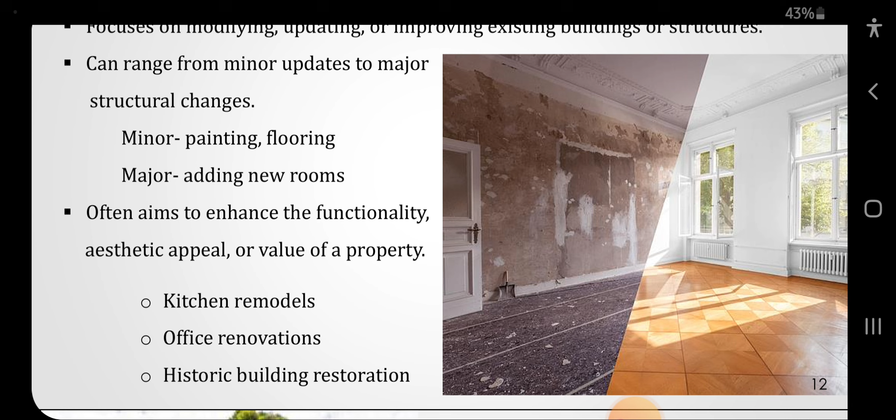Often aimed to enhance the functionality, aesthetic appeal or value of a property. ක්‍රියාකාරීත්වය වැඩි දියුණු කිරීමක් එහෙම නැත්නම් අලංකාරය ඉහළ නැංවීමක් සෝ property එකට අලුතෙන් අගය එකතු කිරීමක් සඳහා තමයි මේ වගේ දෙයක් කරන්නේ. kitchen remodels, office renovation, historic building restoration වගේ ඒවාට උදාහරණ.

ඊට පස්සේ අපි බලමු specialized construction කියන්නේ මොකක්ද කියලා. Specialized construction involve projects with specialized requirements, often adhering to standards or involving unique construction techniques. Varies widely depending on the specialization, from sustainable building practices to highly technical installation. Example, green building.

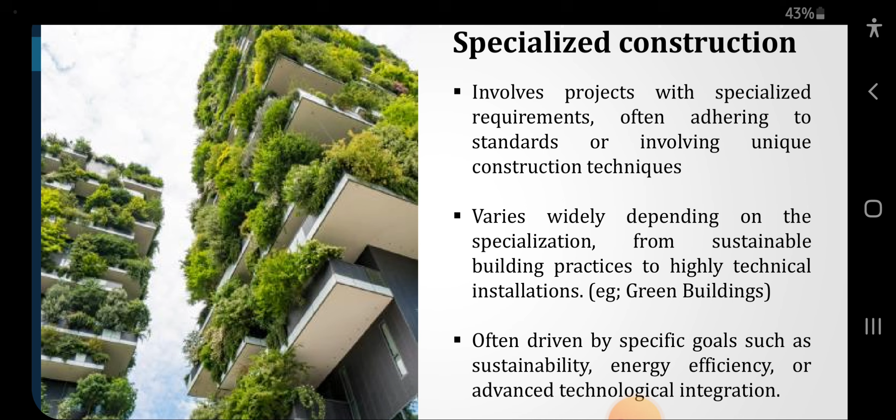So often driven by specific goals such as sustainability, energy efficiency or advanced technological integration. එතකොට specialized construction වලදී ඒගොල්ලෝ goals විදිහට ගන්න පුළුවන් sustainability, energy efficiency and advanced technological integration.

Types of projects වලදී අපි ඊළඟට second one එක කිව්වා based on function and usage. The second type එක තමයි function and usage. This can be identified in several categories such as residential, commercial, government institutional, industrial or infrastructure. When you come to residential, we'll go through one by one: single family houses, multi-family dwellings, high-rise apartments. Focuses on creating space where people live. 30 to 35% of the industry, largely private, designed by architects, builders, or developers.

Governmental institution, the second type: schools and universities, government offices and hospitals.

Commercial: construction of buildings and facilities used for businesses, trade and services. Retail stores and shopping centers, warehouses and light manufacturing. Office buildings, single story or skyscrapers. Hotel, convention centers and theaters.

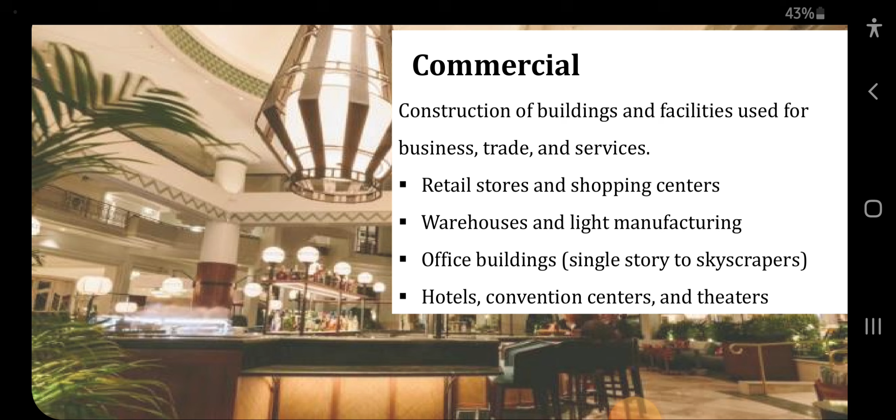Then industrial, this is another special type of construction, where the construction of facilities used for manufacturing, processing and production activities. මේ industrial buildings ගන්නේ manufacturing එකකට යම් නිෂ්පාදනයක් එහෙම නැත්නම් process එකක් එහෙම නැත්නම් production එකක් කිරීමට තමයි මේ buildings design කරන්නේ. උදාහරණයකට petrol refineries ඒකත් construction එකක්. ඛනිජ පිරිපහදුවක්. Steel mills and aluminium plants, chemical processing plants වගේ ඒවා අපිට උදාහරණ විදිහට ගන්න පුළුවන්.

Infrastructure, දැන් අපි infrastructure කියන එක ඒක තවත් construction එකක්. එතකොට ඔබ දන්නවා highways and bridges, railroads, tunnels and reservoirs, airports, seaports, irrigation system, water treatment plants. These are the infrastructural construction.

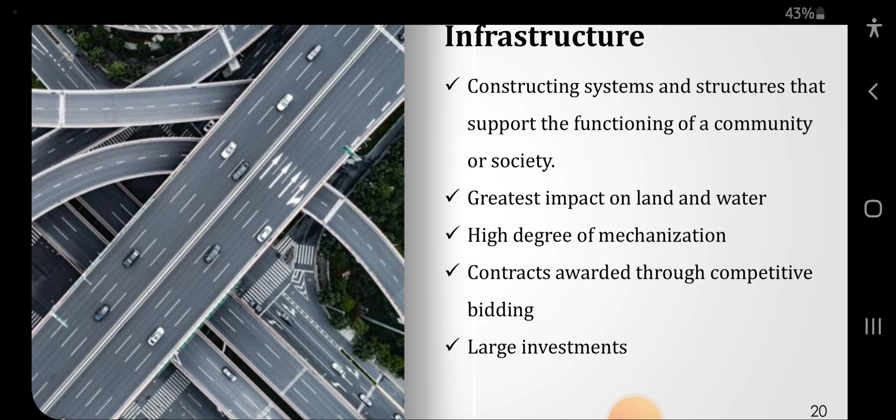Then infrastructure: constructing systems and structures that support the functioning of a community or society. Greatest impact on land and water. High degree of mechanization. Contracts awarded through competitive bidding. Large investment. එතකොට මේ infrastructure කියන එක සංකීර්ණ යනුම ලොකු investment එකක්. එතකොට මේ competitive bidding කියන එකෙන් තමයි මේවට tenders award කරන්නේ.

Okay, now we know what are the two types of construction projects, and we identify each of the two types deeply.

Okay, now we come to a new heading: main parties of a construction project. So construction project එකේ ඉන්න පාර්ශව හඳුනා ගැනීමක් අපි කරන්න යනවා දැන්. What are the main parties of a construction project? I already mentioned some of them, like client, consultant or engineer, contractor and architect are the main parties. Also construction business promoters, construction manpower recruitment and training agencies, banking and finance institutions, construction material developers, construction plant and machinery manufacturers, distributors, repairs and maintenance organizations.

Client. Okay, we will go through each of the parties deeply now. The client or the owner has a specific goal, expectation and a budget that is in alignment with these goals and expectations.

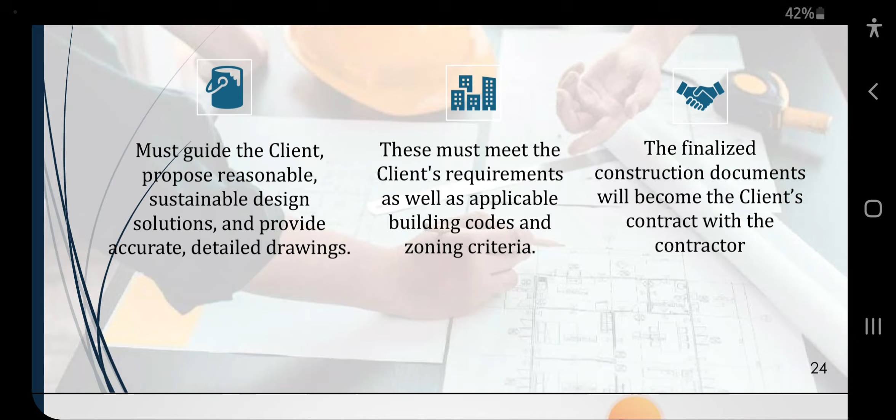The contractor is hired by the client to complete the project, handling the construction part and execution of the work activities required for project completion. Roles and responsibilities include project planning, management, monitoring, construction site safety, and legal issues.

The contractor also appoints subcontractors who have special expertise to execute certain parts of the project that cannot be constructed by the contractor. So subcontractor is another term that you have to keep in mind.

Types of contractors: traditional contractors, design bid build method, where the client wishes to use their own design and appoints a consultant to design. Design and build contractors, where the project is more functional and the client does not wish to use their own design.

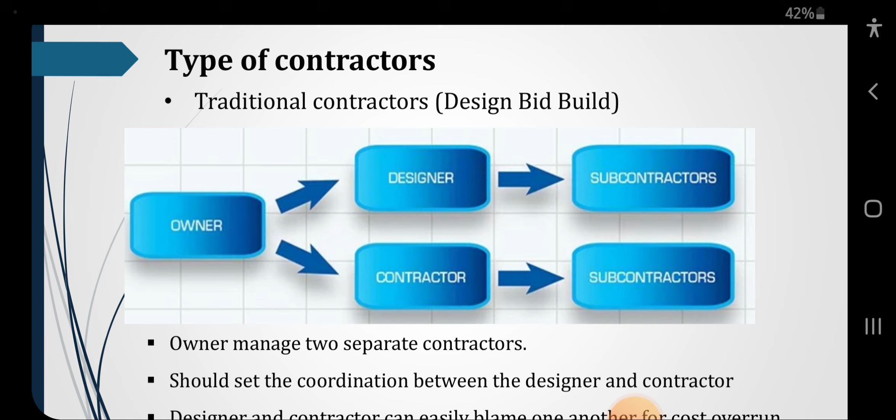Types of contractors: traditional contractors, or design bid build. The owner, designer, and contractor are two separate parties. The designer has subcontractors and the contractor also has subcontractors. The owner manages two separate contractors, the designer and contractor, and should set coordination between them. Designer and contractor can easily blame one another for cost overrun.

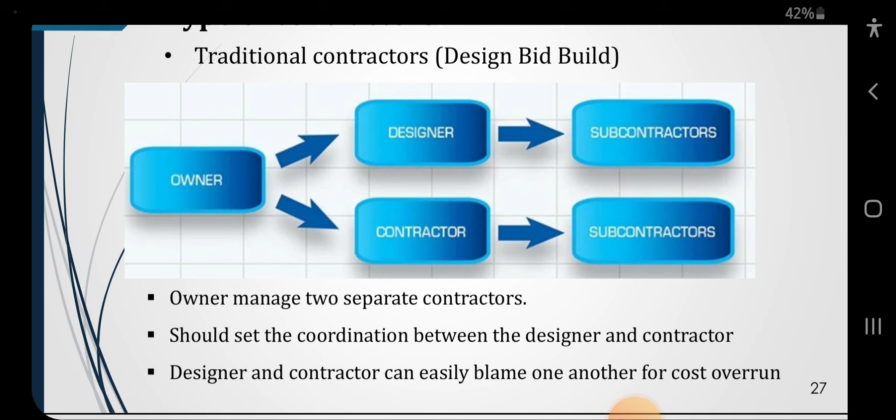Type of contractor: design and build contractor, compared to the previous design bid build contractor. Here the owner manages only the design build team, which then manages the subcontractors. So the owner manages only one contractor with a single point of responsibility, and the designer and contractor are in the same team.

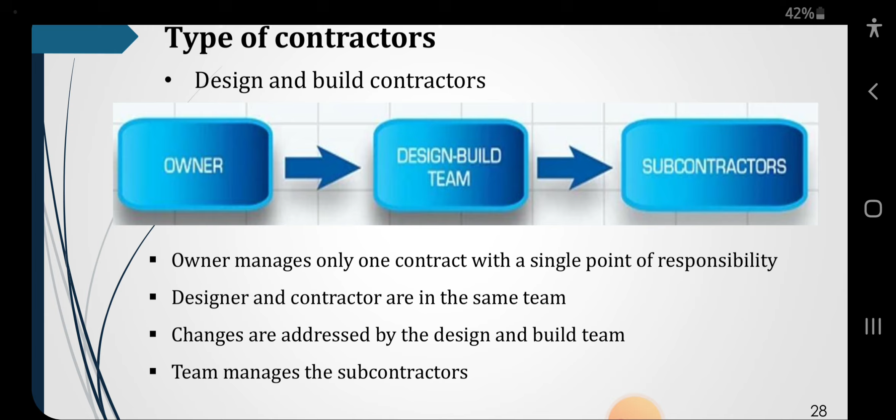Changes are addressed by the design and build team, and the team manages the subcontractors.

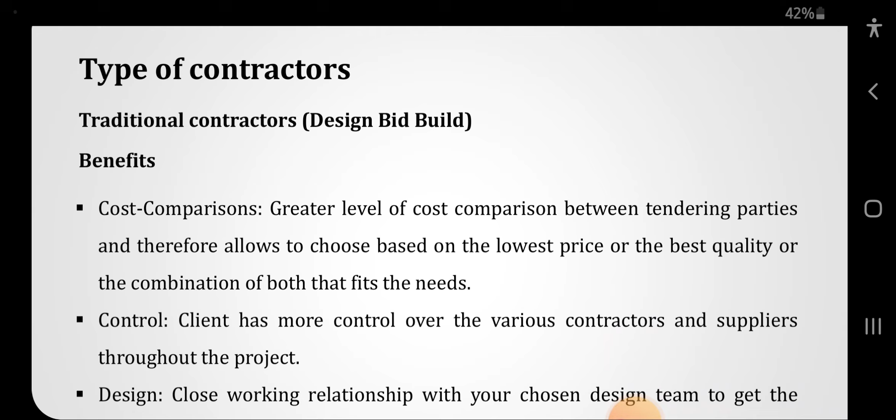Types of contractors: traditional contractor or design and build contractor. Making the right choice between traditional contractor or design and build contractor - who is going to choose between the two options? Now let us see who traditional contractors are, also called design bid build contractors.

Benefits of traditional contractors: cost comparison gives a greater level of cost comparison between tendering parties, allowing you to choose based on the lowest price, the best quality, or a combination of both that fits the need. Control: the client has more control over the various contractors and suppliers through the project. Design: close working relationship with your chosen design team to get the design right.

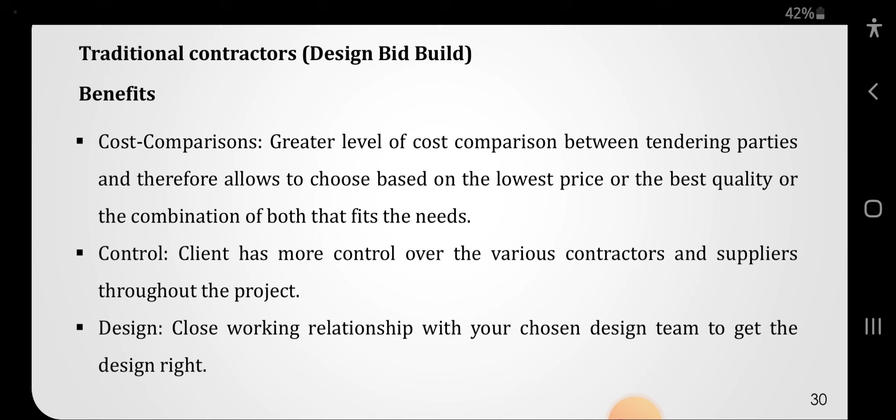Traditional contractor, design bid build - drawbacks and disadvantages: longer tender process. This is likely to take longer in construction, and the designers are separated from the project.

Time consuming: generally, the traditional procurement route is more time consuming and requires coordination and continuous discussions. Multiple contacts: there are usually more parties to communicate with throughout a project, generally including the designer, project manager, main contractor, and consultant, mainly in the pre-construction period.

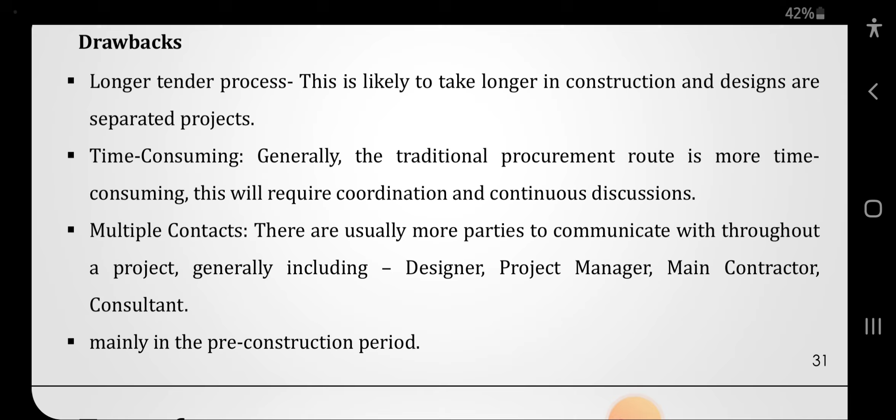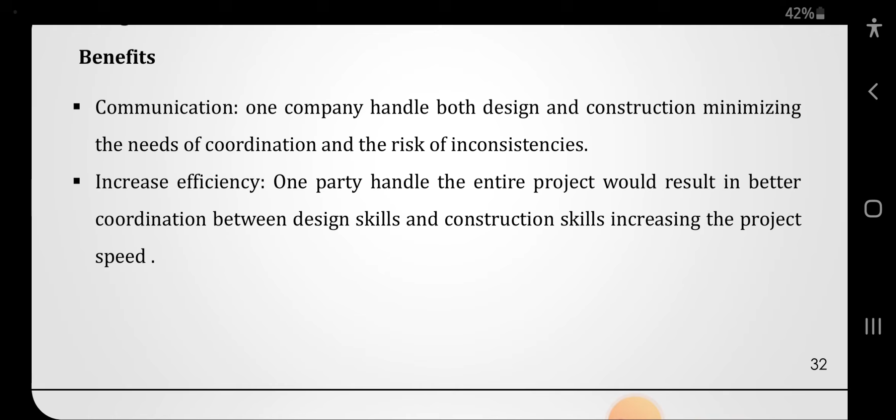Now the second type is design and build contractor, compared to the first design bid build contractor. Benefits or advantages: communication - one company handles both design and construction, minimizing the need for coordination and the risk of inconsistencies. Increased efficiency - one party handling the entire project results in better coordination between design and construction, increasing project speed. Execution here is higher compared to the design bid contract.

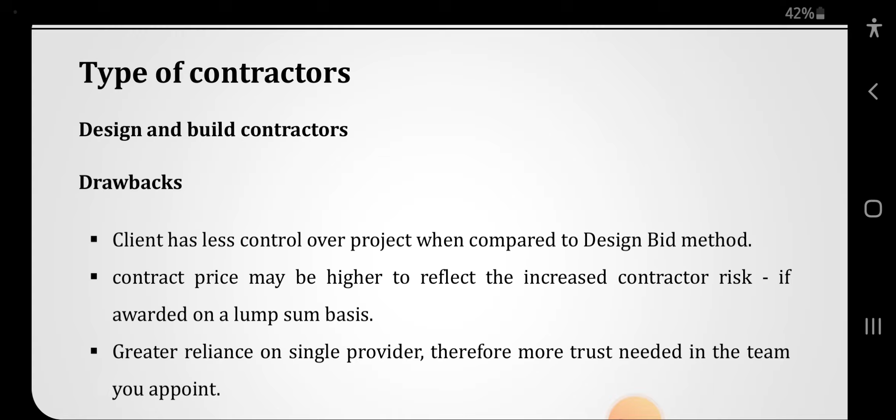Drawbacks or disadvantages: the client has less control over the project compared to the design bid method. Contract price may be higher to reflect increased contractor risk if awarded on a lump sum basis - lump sum meaning a fixed amount of money covers all purposes, designing and construction.

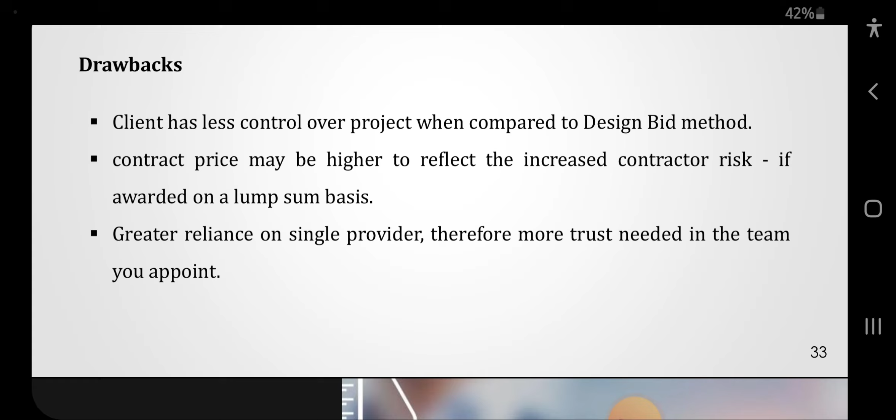Greater reliance on a single provider, therefore more trust is needed in the team you appoint. The reliance is only on a single contractor, so you should appoint a more trustworthy person for the contractor. That is the disadvantage, because it's difficult to find a trustworthy person.

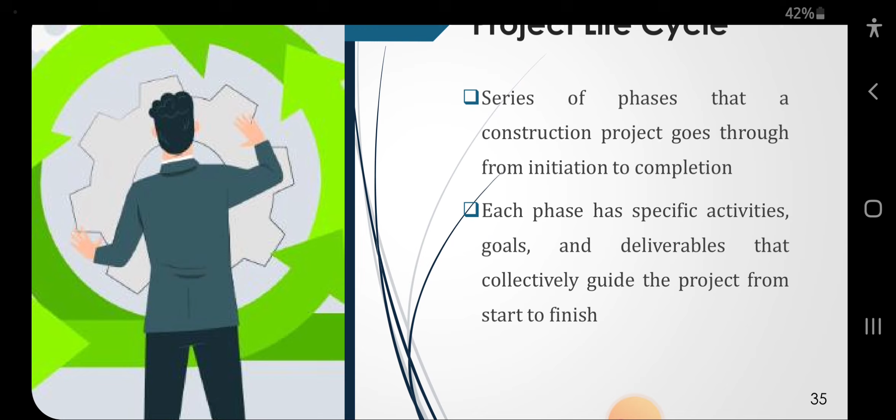Now we will discuss project life cycle: a series of phases that the construction project goes through from initiation to completion. Each phase has specific activities, goals, and deliverables - meaning the output, which can be tangible or intangible - that collectively guide the project from start to finish.

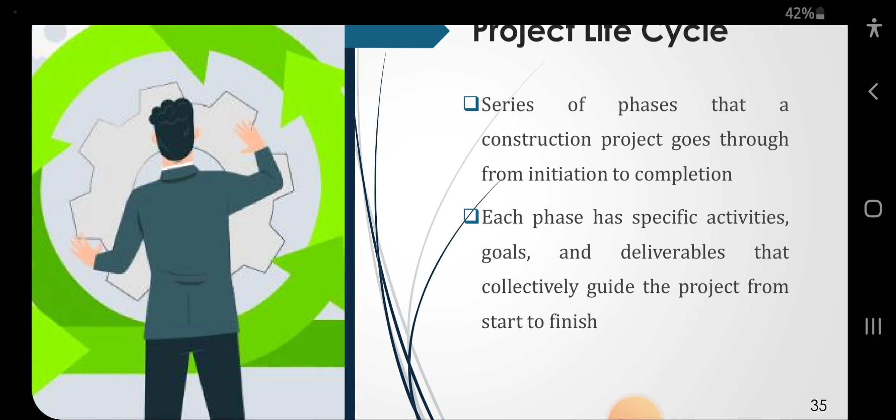Now we will identify the interconnected activities of the project life cycle: Phase 1, initiation; Phase 2, planning; Phase 3, execution; Phase 4, monitor and control; and Phase 5, close out, or project closing. Now we will go through each of the steps one by one.

Initiation is to define the project's purpose, feasibility, and scope. Feasibility means the suitability of the project, whether we will do it or not, and can be measured in terms of financial, economic, environmental, and sustainability factors, among many others. This includes project idea or need identification, feasibility studies and analysis, preliminary budget estimation, and project charter development.

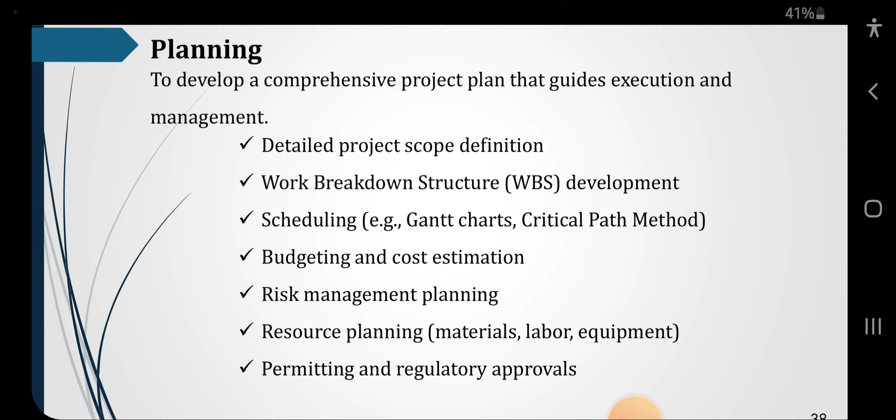Okay, the second phase, planning. To develop a comprehensive project plan that guides execution and management: detailed project scope definition, work breakdown structure development, scheduling (Gantt chart, critical path method), budgeting and cost estimation, risk management planning, and resource planning - that is material, labor and equipment. These are the main resources that any construction project needs, then permitting and regulatory approvals like UDA approvals, local council approvals.

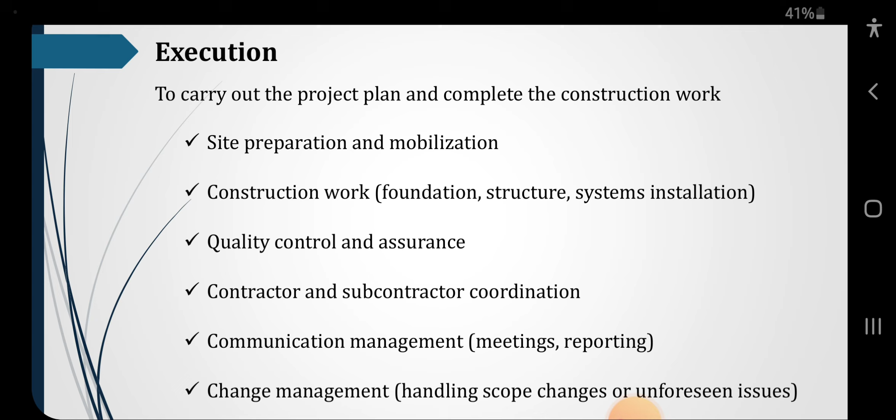Now execution: to carry out the project plan and complete the construction work. Site preparation and mobilization - going to the site and setting up the initial stages. Construction work, that is foundation work, structure, system installations. First we need to build a foundation, and based on that foundation only we can build a structure. Then other services, quality control and assurance, contractor and subcontractor coordination, communication management - that is meeting, reporting, change management, handling scope changes or unforeseen issues.

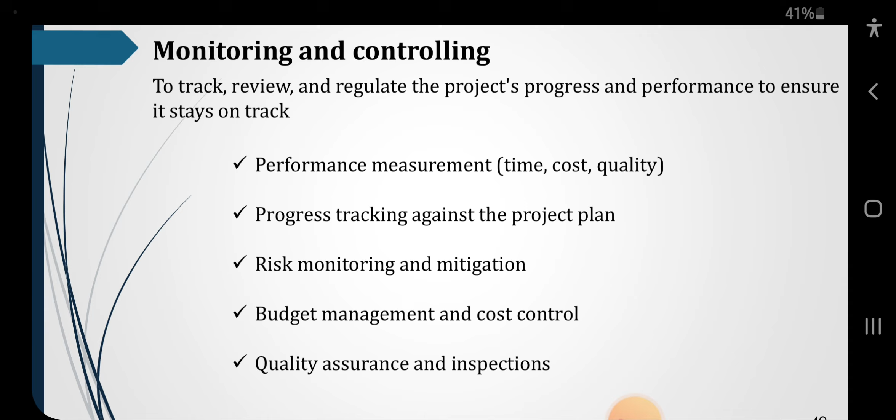Monitoring and controlling - the next step in the project life cycle, to track, review and regulate the project's progress and performance to ensure it stays on track. Performance measurement, that is time, quality, cost - the triple constraint of a construction project. Progress tracking against the project plan, risk monitoring and mitigation, budget management and cost control, quality assurance and inspections.

Closing the project, our last or final stage, to formally complete and close the project, ensuring all work is finished and handed over to the client. So final inspection, project handover to the client, final financial reconciliations and payment, post-construction evaluation, and release of project resources - that is labor and equipment for other projects.

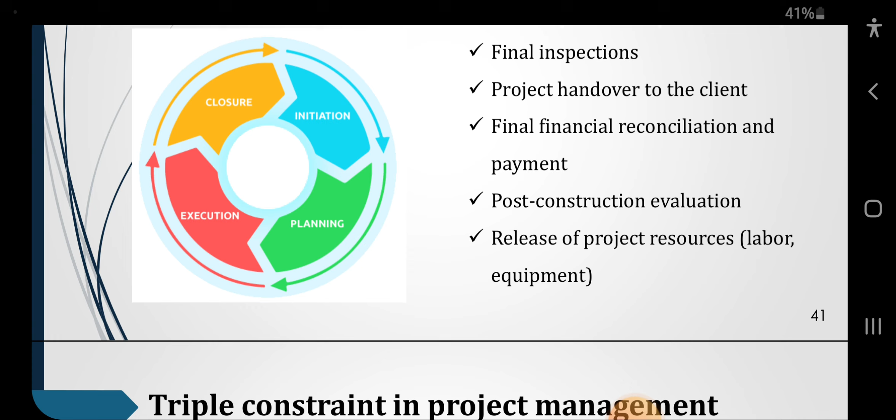Right, now we know what are the stages of a project life cycle, and we have a little bit of an idea about what each step actually means and what things are included in each step.

Now, what you have to keep in mind is that time, cost and quality are the triple constraint or the three main governing factors of any construction project. Time is the available time to deliver the project - any project has goals, objectives, starting time and ending time, specific activities going on for a certain amount of time, after which it doesn't happen again. Cost is the amount of money or resources available to execute the project. Quality is fit to purpose - the project must achieve this to be a success, meaning the status or success of the project.

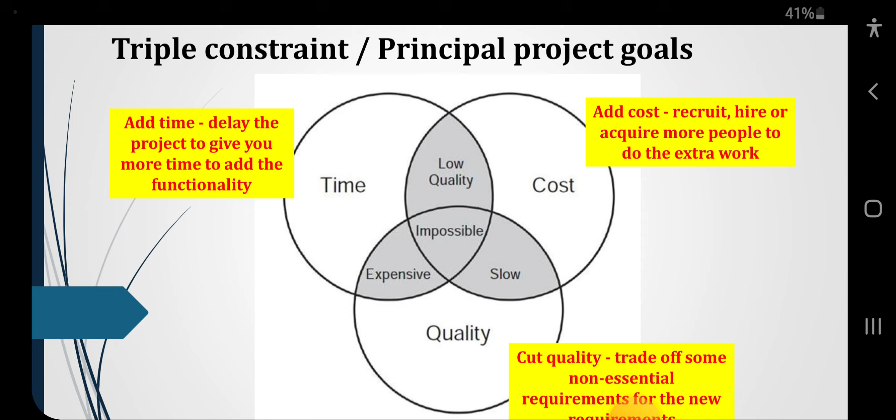Triple constraint principal project goals: time, cost, quality. Add cost, recruit, hire or acquire more people to do the extra work - that is sometimes called project crashing. Cut quality, trade-offs, some non-essential requirements for new requirements. Add time, delay the project to give more time to add functionality.

Okay, these are the things, the first lesson, the things that you have to know about this subject, the construction design project. So this is the first lesson of this construction design project. Like the similar lesson I have done today, I will be doing another theory part in future. Until then, you can go through these lessons again and try to grasp the knowledge at the starting point of this lesson, of this course, of this unit, right?